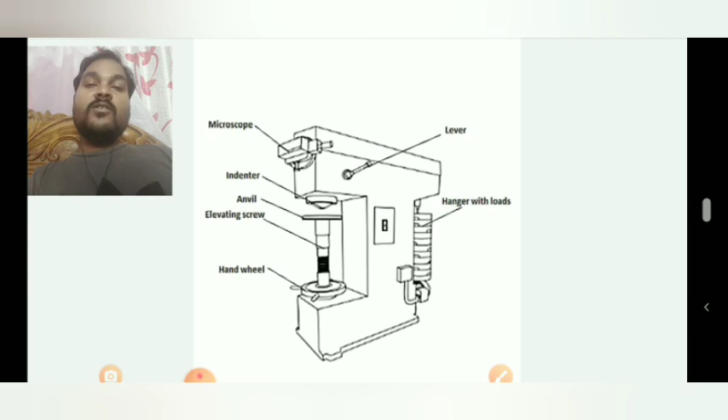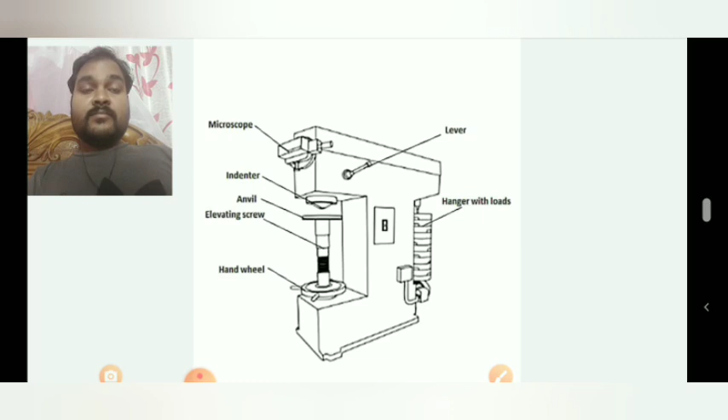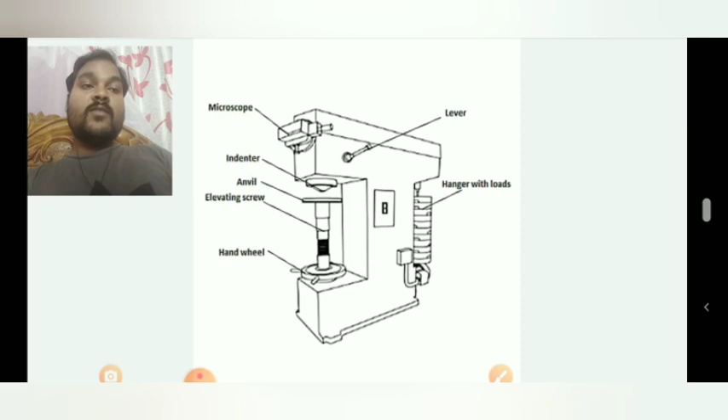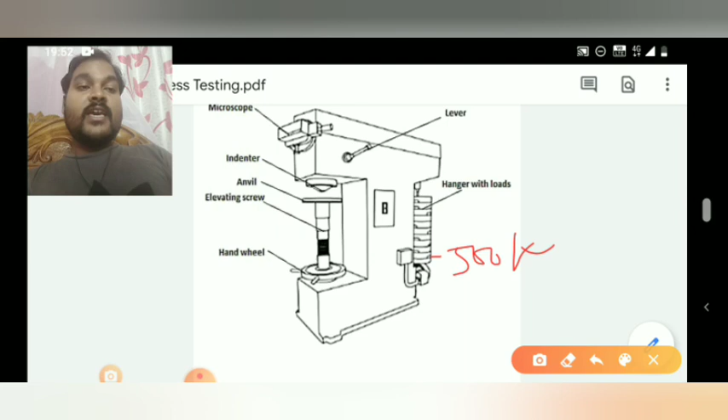First, we'll discuss the machine and how we use it. In our Brinell hardness testing machine, on the backside we have the hanger with load. In this position, we have different types of load, around 500 kg to 3000 kg. We also have a lever, and by this lever we apply however much load is needed.

This is the microscope which is used to detect the indentation, and this is the indenter position where we place or fix the indenter. Here we use the steel ball indenter.

Next is the anvil where we place the sample. We place the sample here, apply the load, and this indenter will press the material. We take the indentation reading with the help of the microscope.

This is the elevating screw which helps the anvil move up and down. This is the hand wheel - with the help of the hand wheel, we move the anvil position up and down, to fix the sample position towards the indenter. This is the basic knowledge of this machine.

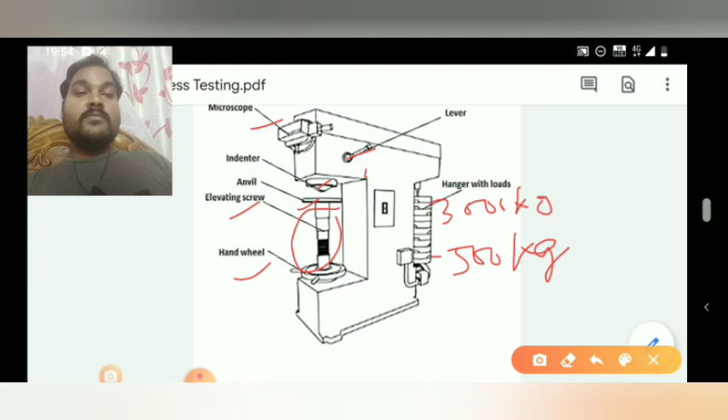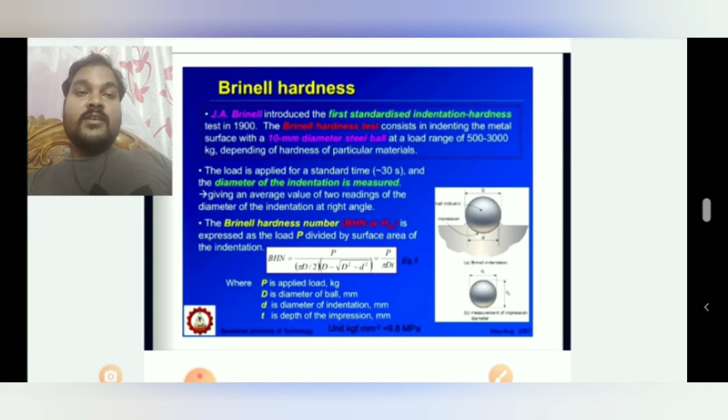Now we'll discuss how the Brinell hardness testing came about, and who first discovered the Brinell hardness testing operation. Scientist J. A. Brinell first discovered the Brinell hardness testing operation. J. A. Brinell introduced the first standard indentation hardness test in 1900.

The Brinell hardness test consists of indenting the metal surface with a 10 diameter steel ball, meaning the ball diameter is 10, at a load range of 500 to 3000 kg. So here we use up to 500 to 3000 kg load, which helps create that indentation.

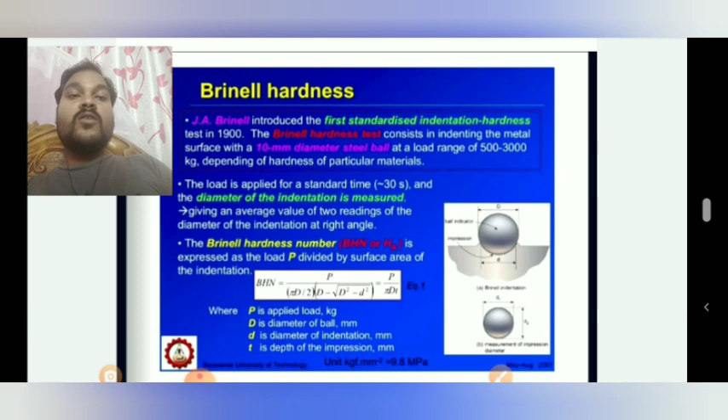After applying the load and taking the indentation, we measure the diameter of the indentation. We take an average value of two readings of the diameter of indentation at right angles. This is the steel ball used as the indenter, which applies force into the material and produces the indentation, which also produces a separate diameter.

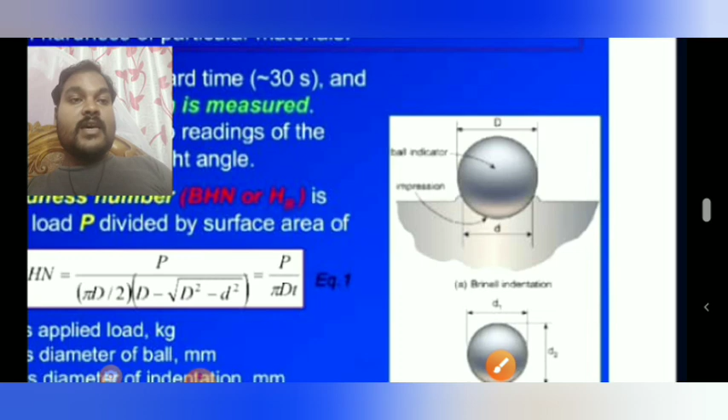The steel ball diameter is capital D, and the indentation diameter produced will be small d. This small d is measured by scale, taking at least two values. This diameter value is measured two times, and this is divided by 2 to get the average value.

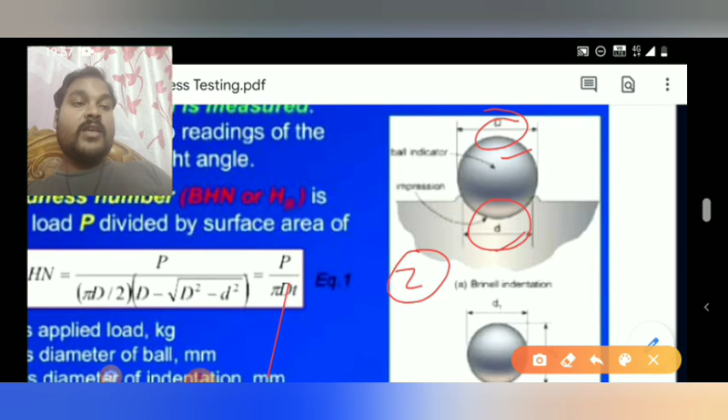The Brinell hardness number is expressed as load divided by surface area of indentation. The formula is: applied load - how much load is applied to the material to produce the indentation - divided by the surface or area of indentation, which is the total area created with the help of the indenter.

The formula is: Load applied divided by pi into D into t, where D is the diameter of the steel ball, and t is the depth of indentation - meaning how much depth the indenter introduces into the material.

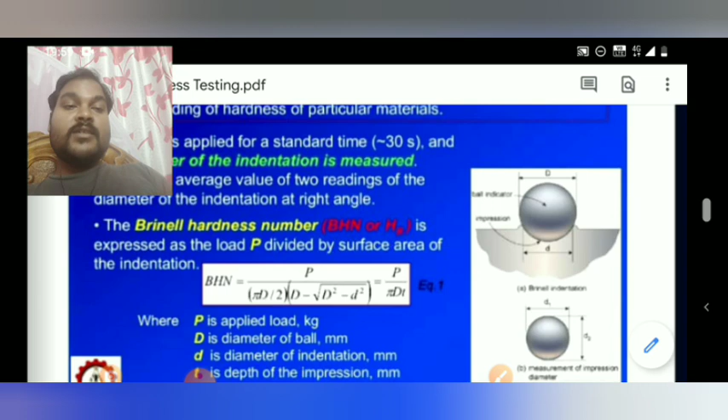So normally we use the formula BHN equal to P divided by [pi D by 2] into [D minus root over D square minus d square], where P is the applied load in kg, capital D is the diameter of the steel ball, small d is the diameter of indentation, and T is the depth of impression.

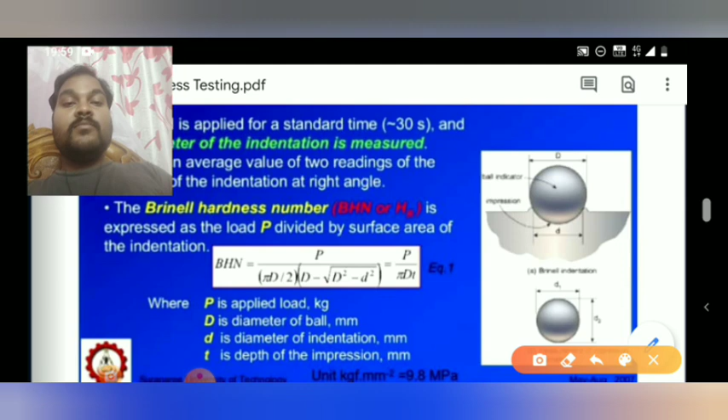Here we use P divided by pi d t. Here we are taking the small t, which is the depth of indentation.

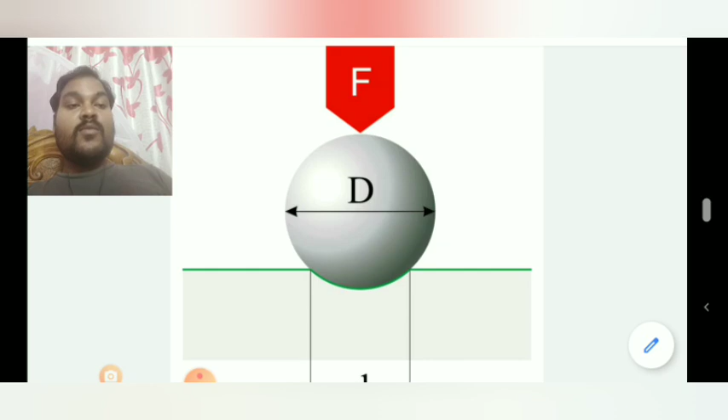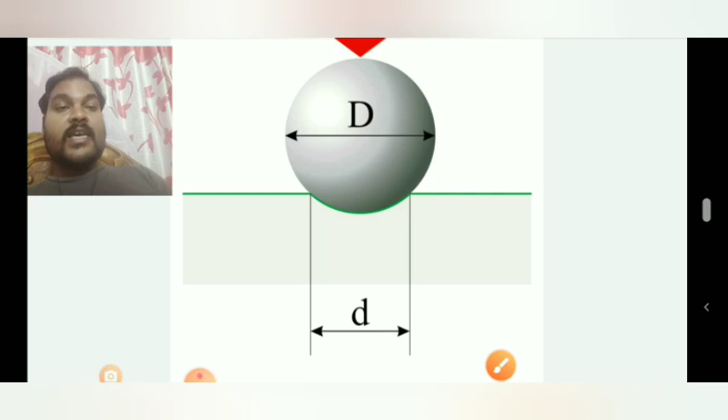Okay, now we'll see again. This is the applied force, this is the steel ball, and we applied that force F and produced the indentation area. This is the area of indentation, this total area is the indentation area. So we calculate this indentation area, and this way we calculate the value of hardness number.

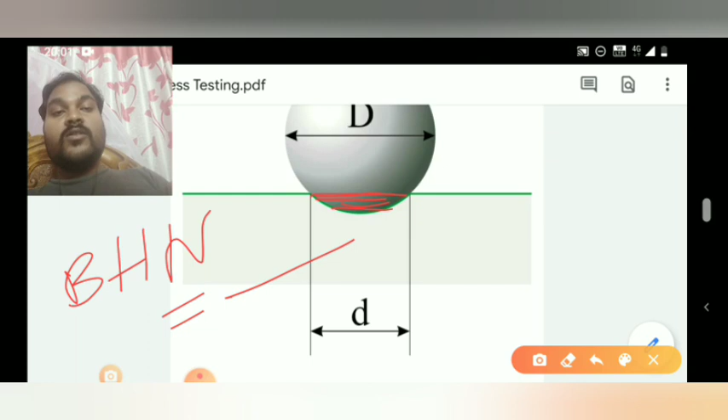Brinell hardness number will be denoted by BHN. BHN equal to the applied load divided by area of the indentation, which will be denoted by pi into d into h, or we can write it as small t, right, h or small t.

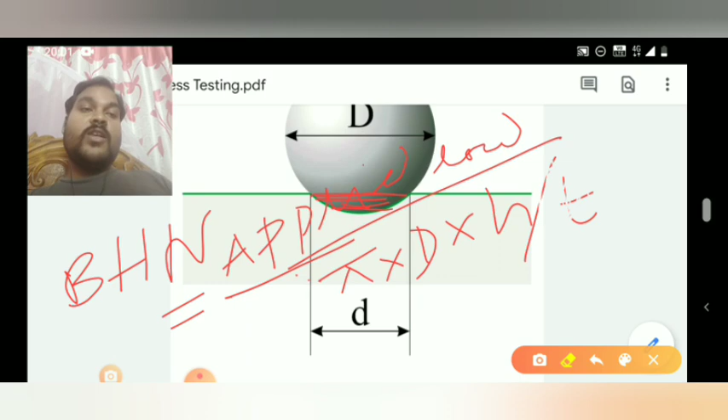Here we use small h as the depth of indentation. Okay, now what are the precautions used in this testing operation?

First of all, the precaution we use: the thickness of the specimen should not be less than 8 times the depth of indentation, to avoid the deformation extending to the opposite surface of the specimen.

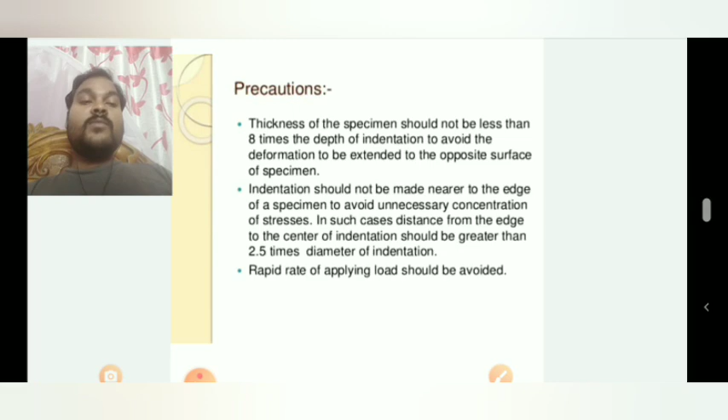That means, suppose you take the sample and the steel ball which has diameter 10. This steel ball diameter is denoted by capital D. So this area is d by 2, and this is the indentation.

So what is the depth of indentation? This is the depth of indentation, which is denoted by small h. So the sample thickness at this depth of indentation would be 8 times the depth of indentation. So sample size would be 8 into h, that means 8 times that value we need for the sample size.

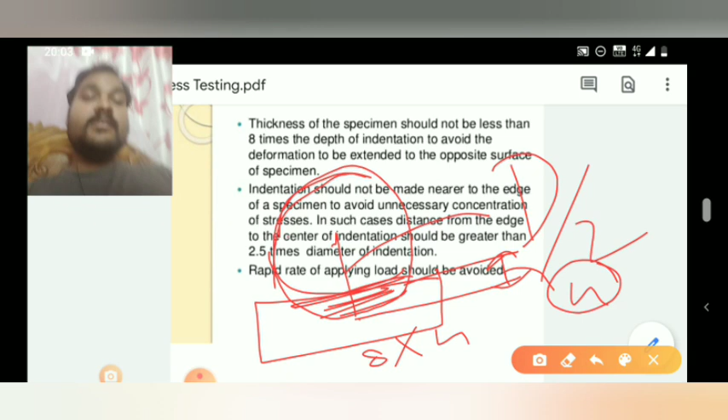Next, the indentation should not be made near the edge of the specimen, to avoid unnecessary concentration of stress. In such case, the distance from the edge to the center of the indentation should be greater than 2.5 times the diameter of indentation.

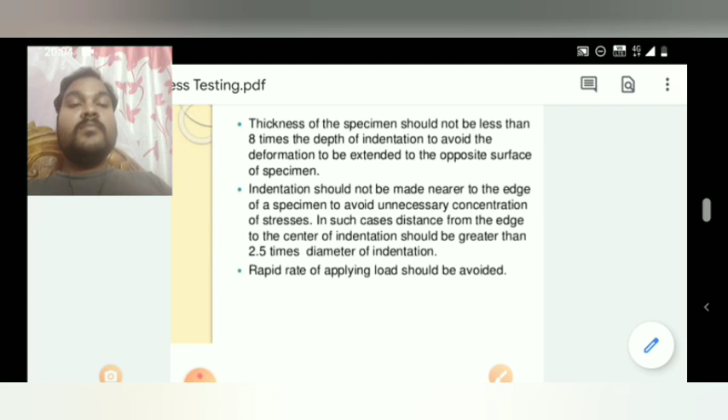Here also we see we cannot take the hardness at the end of the sample. That means, suppose this is the sample, we cannot take the hardness value at the surface point. If we take the hardness value at the surface point, it can produce different types of unnecessary concentration of stress.

That means in that position maximum pressure will be created and the depth of indentation will get a greater value. So we cannot tell the appropriate value of the Brinell hardness number, or we cannot take the actual value of hardness of that material.

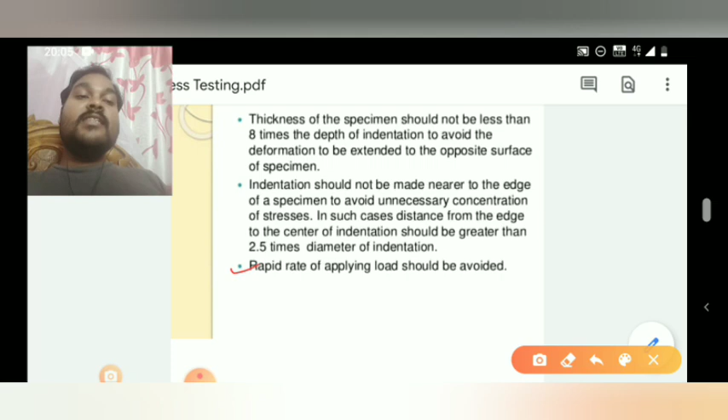And the third precaution is that a rapid rate of applied load should be avoided. We cannot apply that load again and again.

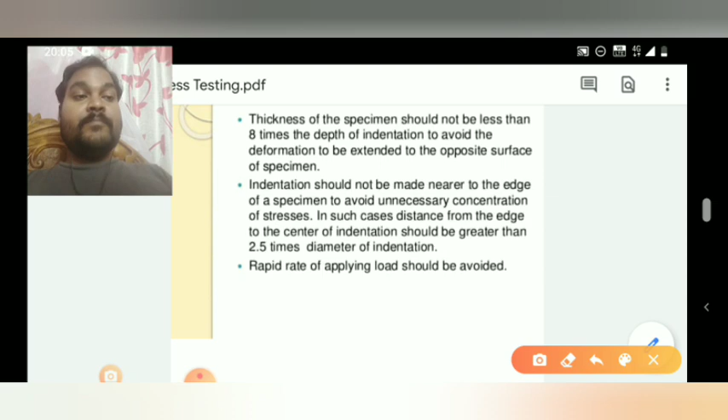So these are the precautions. The main precaution is the first one: the thickness of the sample should be 8 times the depth of indentation. Okay, and now we'll see this is the diameter of the steel ball.

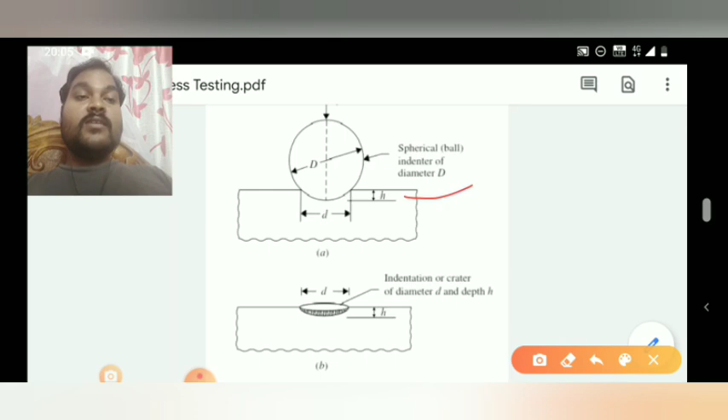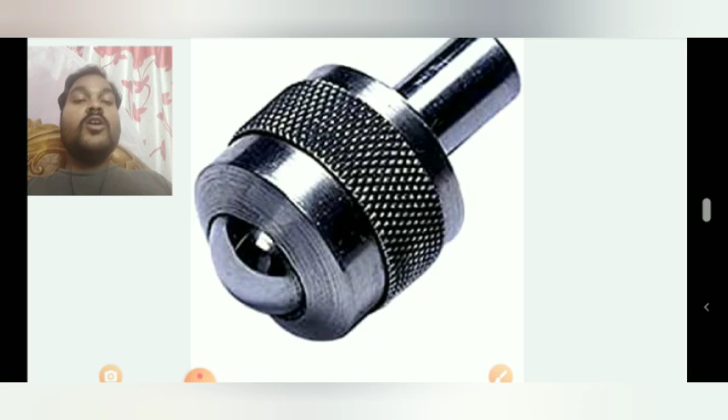This is the depth of indentation, denoted by small h. Now, we use a steel ball as indenter in case of Brinell hardness testing operation. In most cases, we use the steel ball which has diameter 10 mm, but we can also use a 5 diameter steel ball.

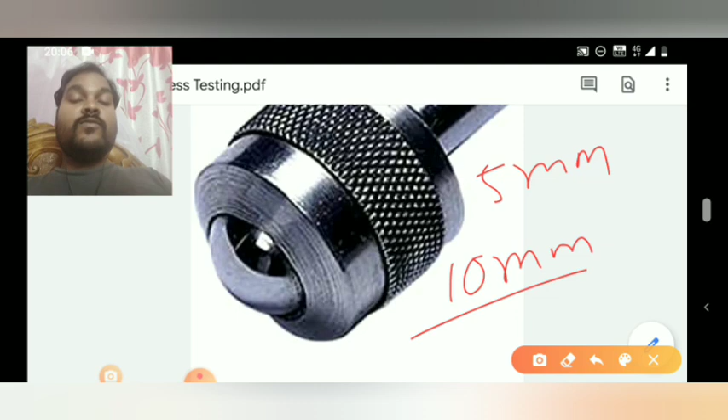So two things vary: one is the indenter size, and the other is how much amount of load we use in this hardness operation. Here we use the hardness load 500 kg to 3000 kg. This is the maximum value of load, 3000 kg.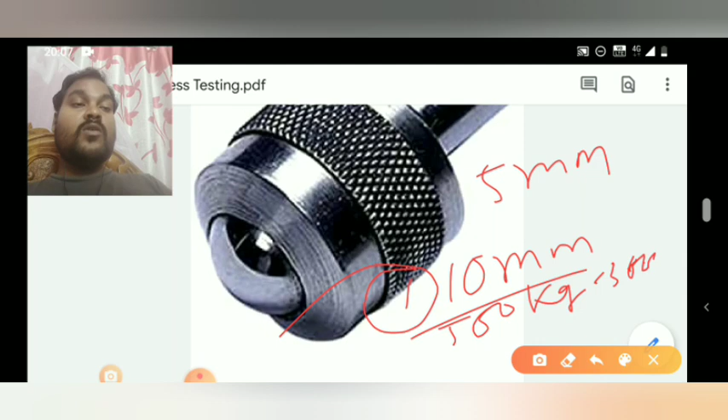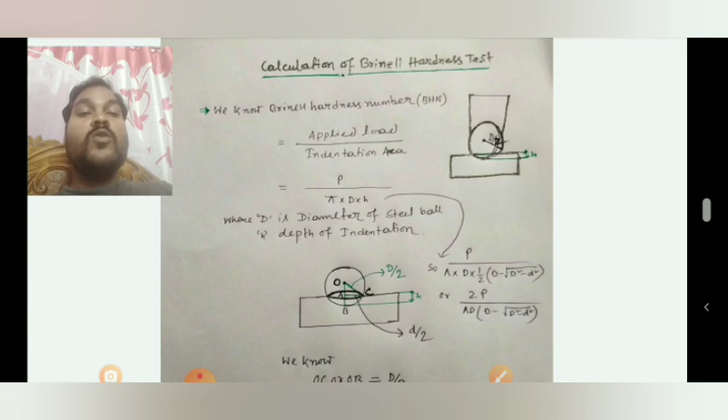Okay, now we'll discuss the calculation of the Brinell hardness test. This is vital for the Brinell hardness testing operation. How do we calculate? We know Brinell hardness number, denoted by BHN, is equal to applied load divided by indentation area.

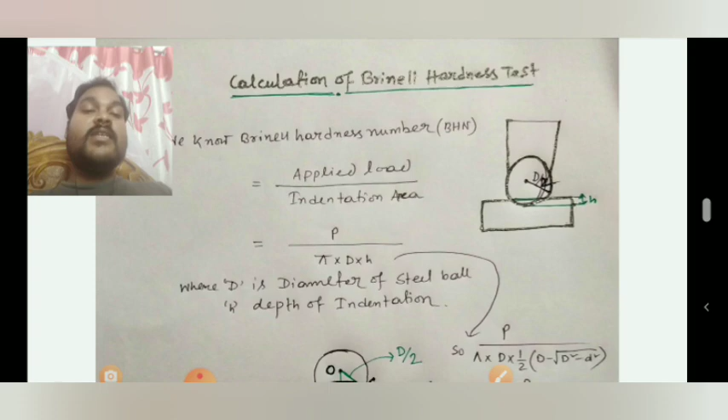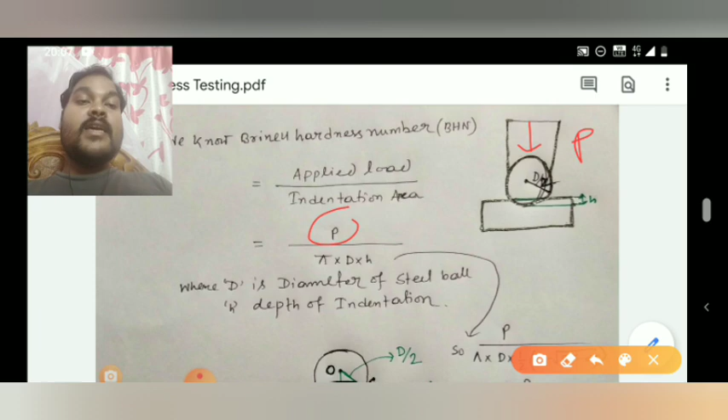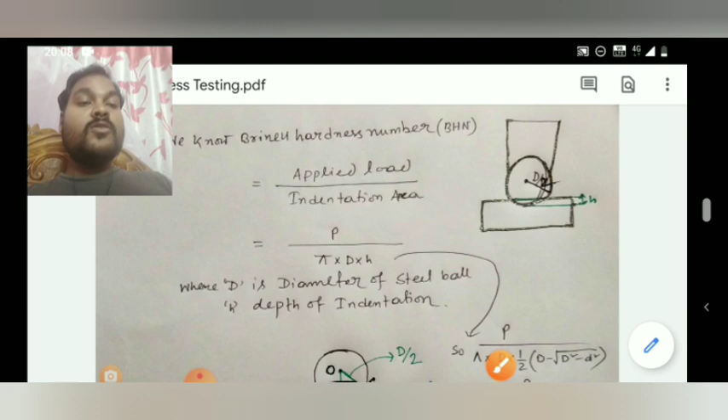So applied load is P. That means the indentation area is pi times d into h, where d is the diameter of the steel ball and h is the depth of indentation. So we don't know the value of h. So how do we calculate the value of h?

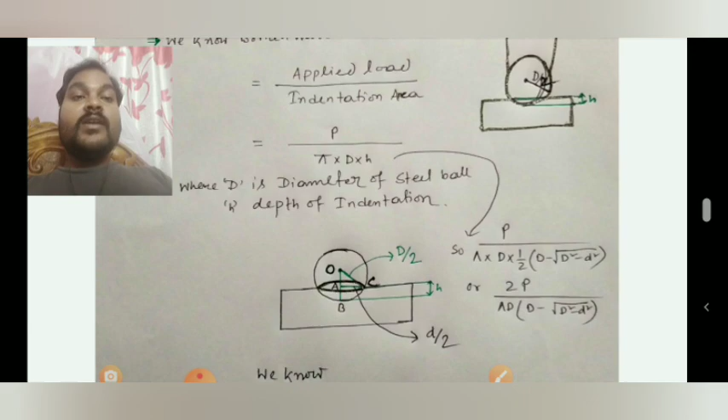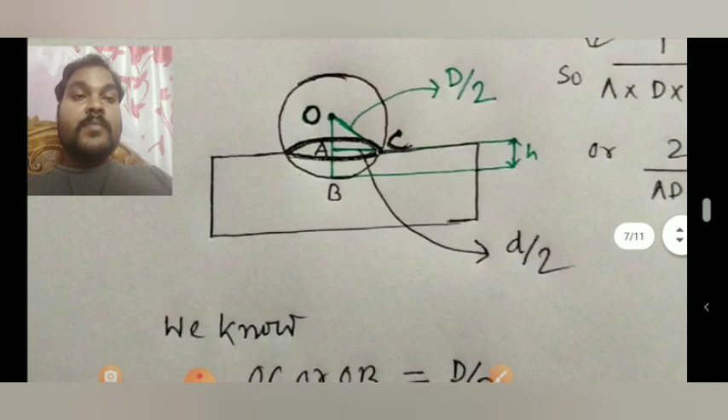As we know, if we do not know the h value, then we cannot get the actual indentation area. So first let's see the actual dimension of the sample, or actual dimension of the indenter. Suppose we take a sample, this is the sample.

This is the steel ball, and we applied the load from above, which is P. When we applied the load, it penetrates into the material and produces an indentation, giving us the h value, the depth of indentation. So OC, this value, is the capital D divided by 2, which is the radius of the steel ball.

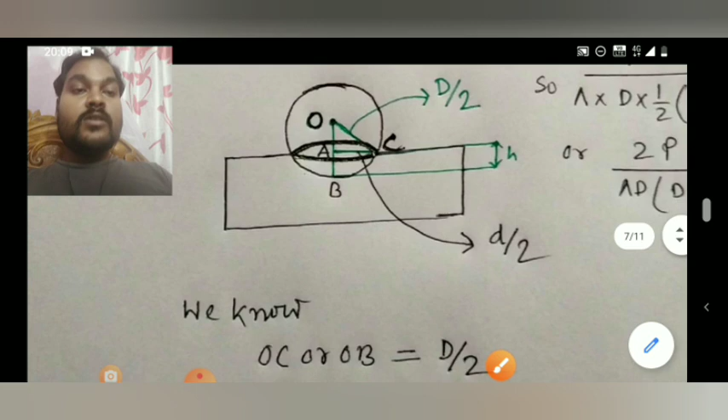So we can say OC equals OB, because this is also a radius of the steel ball. So that's why we write OC or OB equal to D by 2. But we need the value of AB, which is h, but we don't know the value of h.

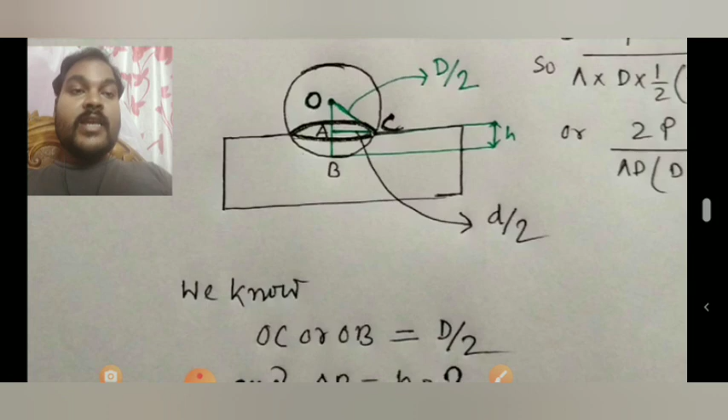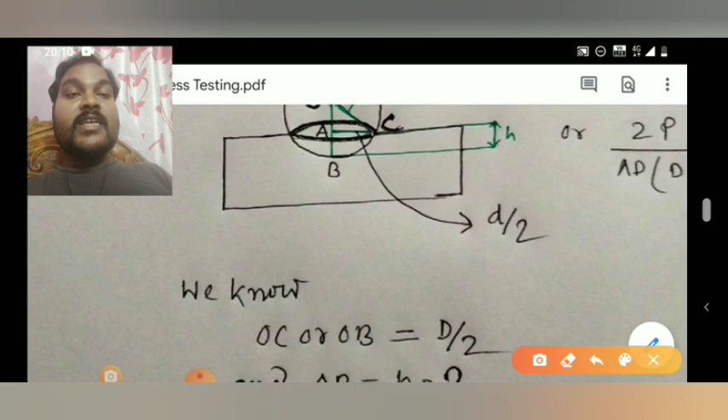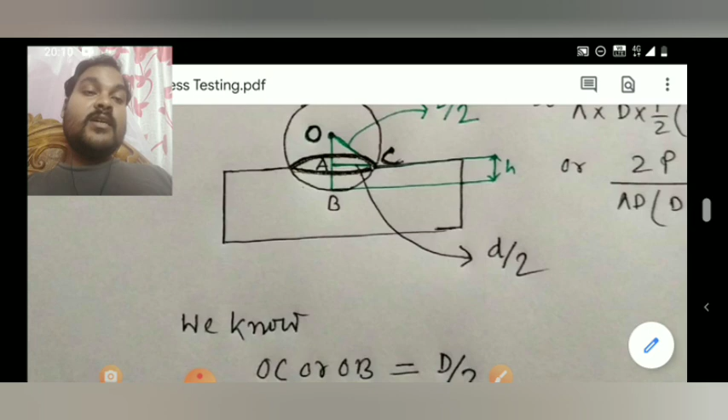So first we don't know the value of OA, and here this green color line, which is also small d by 2, is the diameter of the produced indentation area, denoted by small d, which is the diameter of indentation. So its radius is also d by 2.

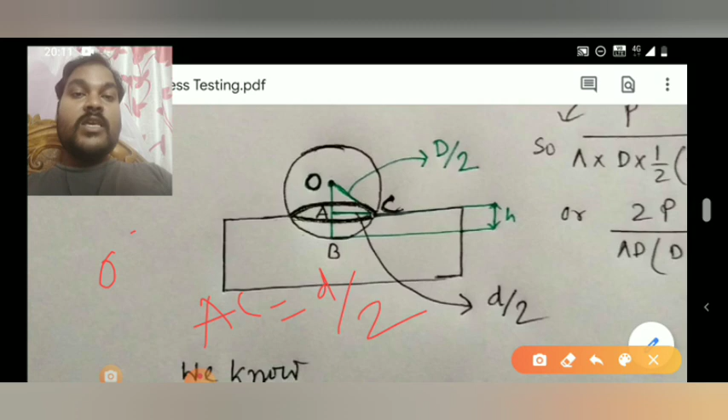So we can say AC is the small d divided by 2. So we know OC equals capital D by 2, and AC equals small d by 2, and OC, or we can say OB, is also the radius of the steel ball.

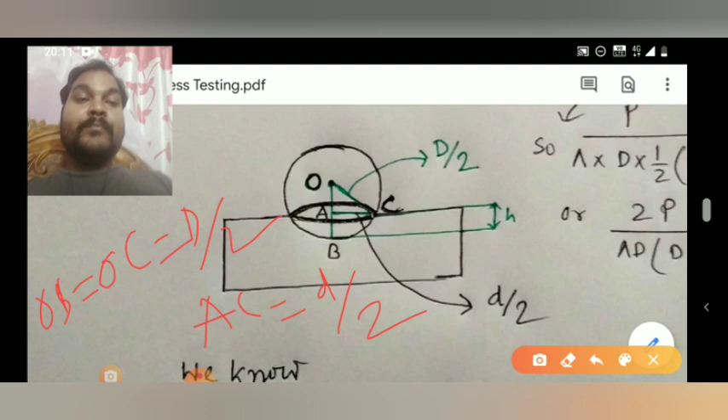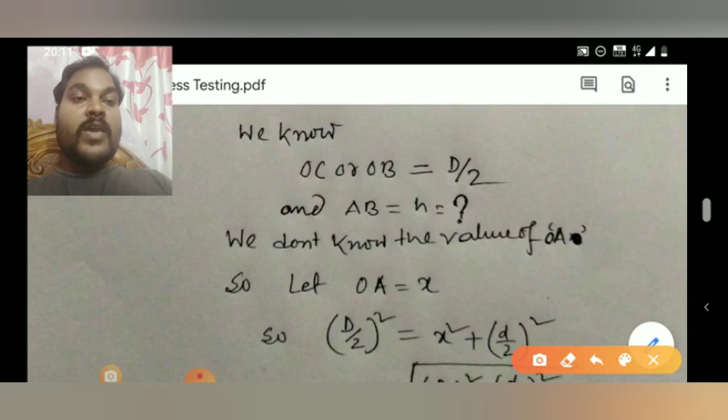So first we'll calculate the value of OA. We take the value OA equal to x. So OA equal to x, we can write OC square equal to OA square plus AC square.

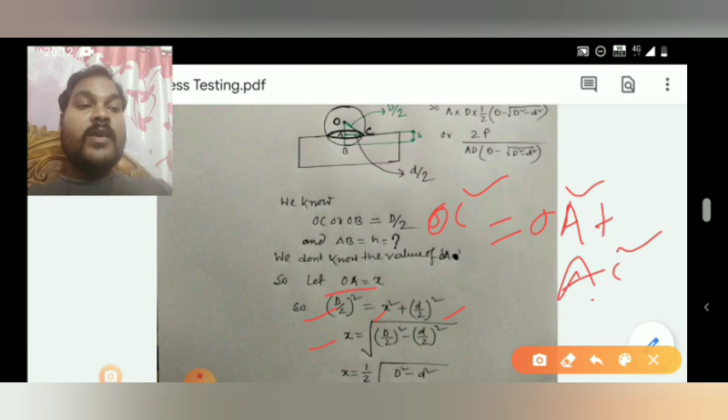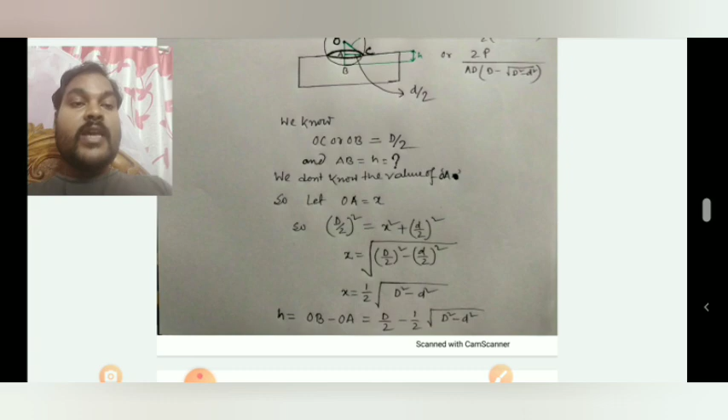So capital D by 2 square equals x square, because we take OA equal to x, plus AC square, and AC is small d by 2. From that position we get the value x equal to root over capital D by 2 square minus small d by 2 square. So when we transform this equation, we get x equal to half into root over capital D square minus small d square.

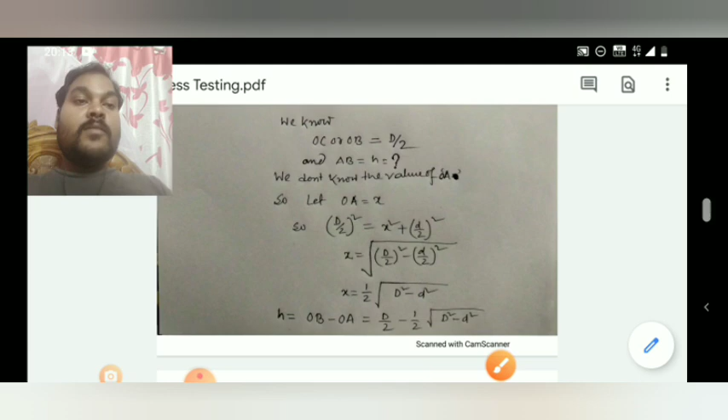But this is the value of x, meaning the OA value. So this is the OA value. But we want to know the h value.

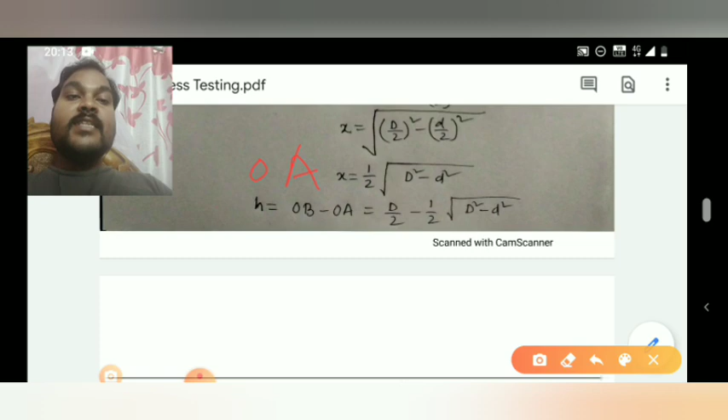So h equal to AB. How do we get the AB value? AB value equals OB minus OA. We know OA equal to x, and we get the value of x, and OB equal to capital D divided by 2. So capital D divided by 2 minus x, this is the value of AB.

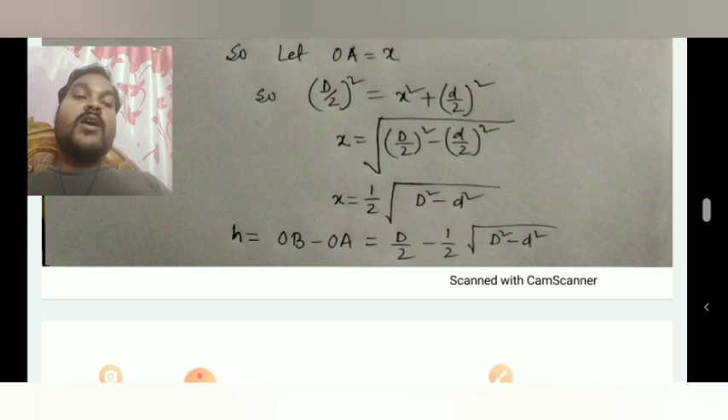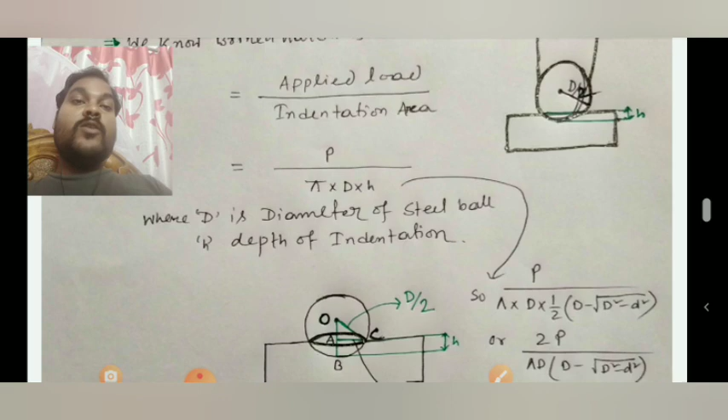This is the value of AB, that means the h value. So h equal to capital D divided by 2 minus half into root over capital D square minus small d square. From that point of view we can write, we know BHN equal to P divided by pi dh.

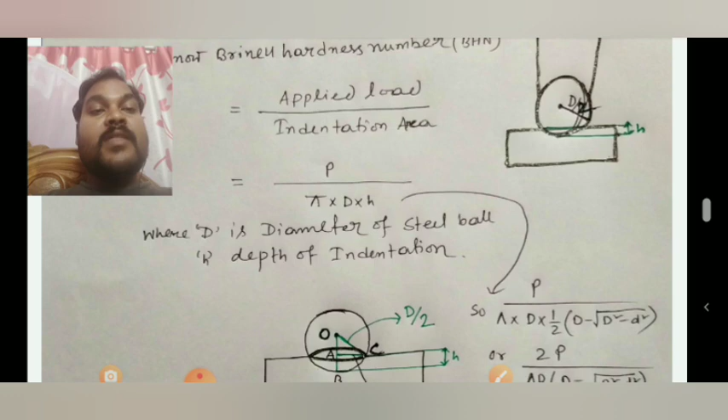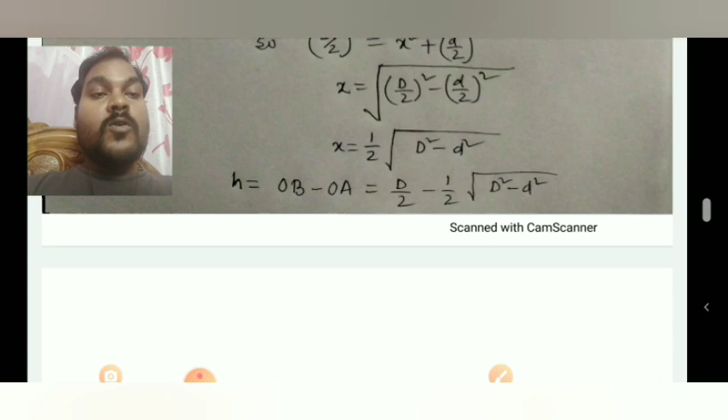So now we have the value of h. So P divided by pi into capital D, and the h value equal to, taking the common value as half, half into capital D minus root over capital D square minus small d square.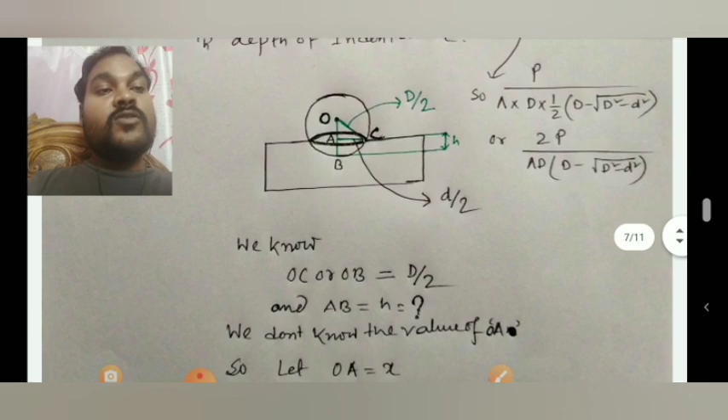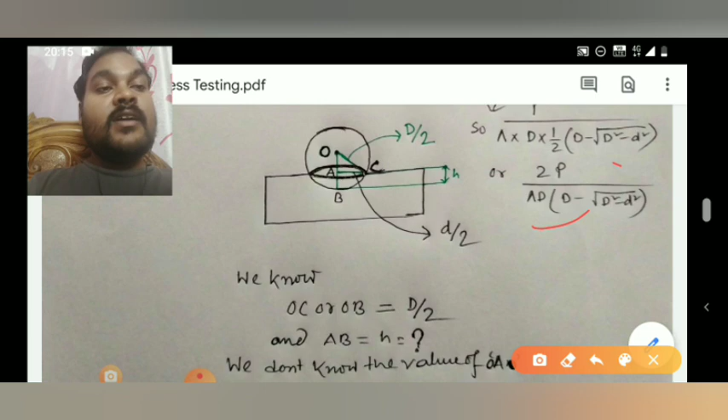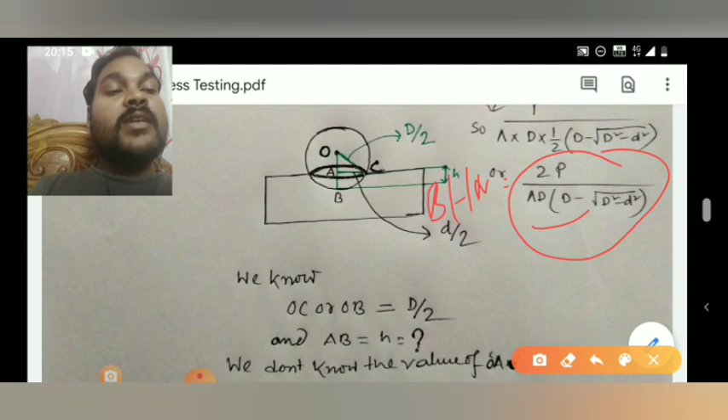So from here we derive this equation: 2P divided by pi capital D into capital D minus root over capital D square minus small d square. This is the actual formula of BHN. So BHN equal to 2P divided by pi capital D into capital D minus root over capital D square minus small d square.

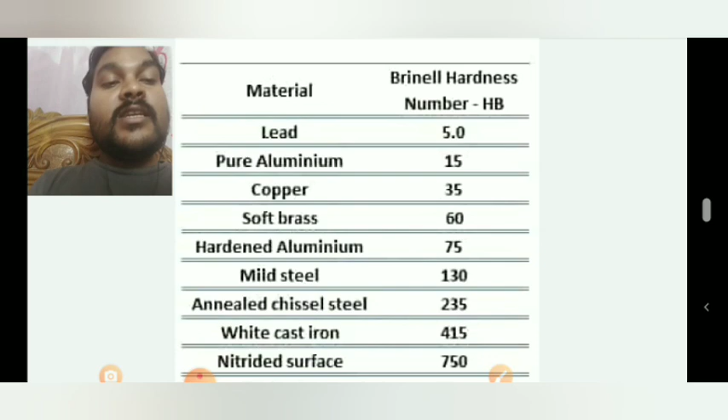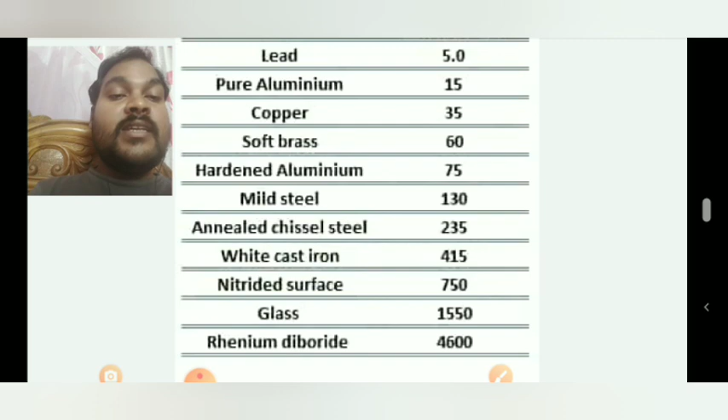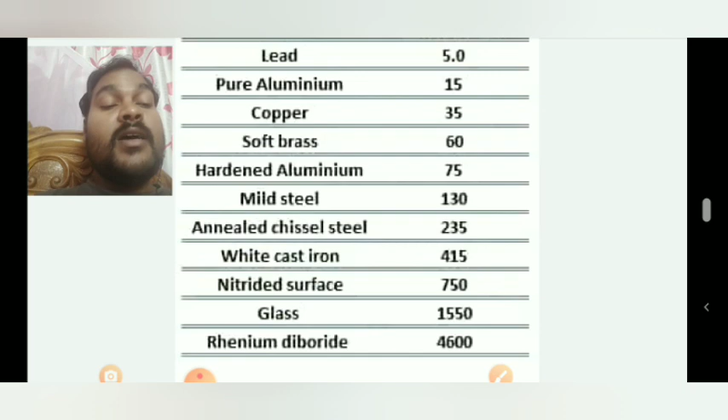So these are the materials, and according to material we have the Brinell hardness number. Lead has a Brinell hardness number around 5. Pure aluminium has 15, copper 35, soft brass 60, hardened aluminium 75, mild steel we take as 130, annealed chisel steel 235, white cast iron 415, nitrided surface 750, glass which is a brittle material 1550, and rhenium diboride has the value of 4600.

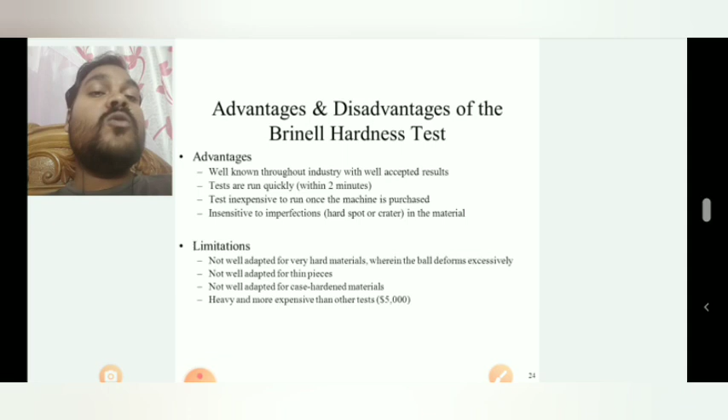It is also not well adapted for case hardened material - in case of case hardened material, we also cannot apply the Brinell hardness test. And it is heavier and more expensive than other tests, if we compare to other hardness tests like Rockwell and Vickers, which are very easy. Mainly the Rockwell hardness test is inexpensive, and we get the value of the material very easily. So compared to Brinell, Rockwell is the fastest hardness operation.

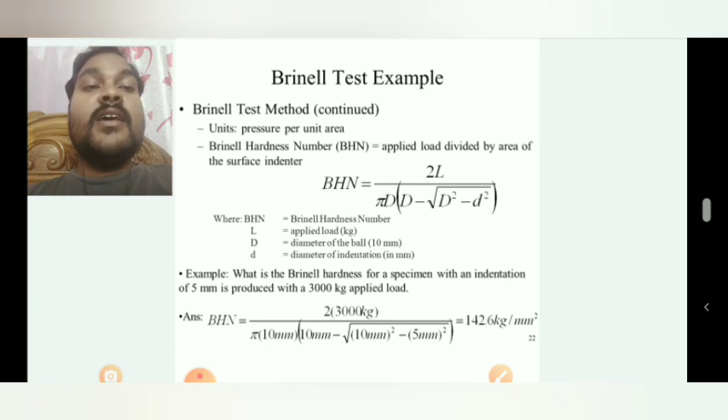So now we'll discuss the Brinell hardness test example. We know the actual formula of Brinell hardness number: BHN equal to 2P divided by pi capital D into capital D minus root over capital D square minus small d square. This is capital D.

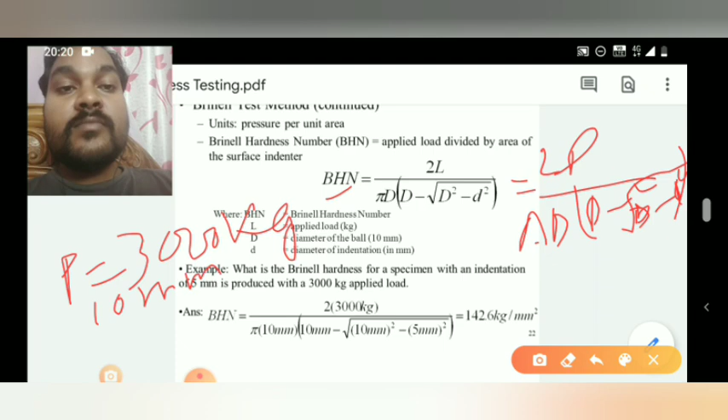So from this formula, we'll see one example. What is the Brinell hardness of a specimen with an indentation of 5 mm produced with a 3000 kg applied load? Here P is 3000 kg. The indentation or indenter diameter is not given, so we'll take the value of 10 mm - this is the capital D value. The given indentation diameter is 5 mm, so small d is 5 mm.

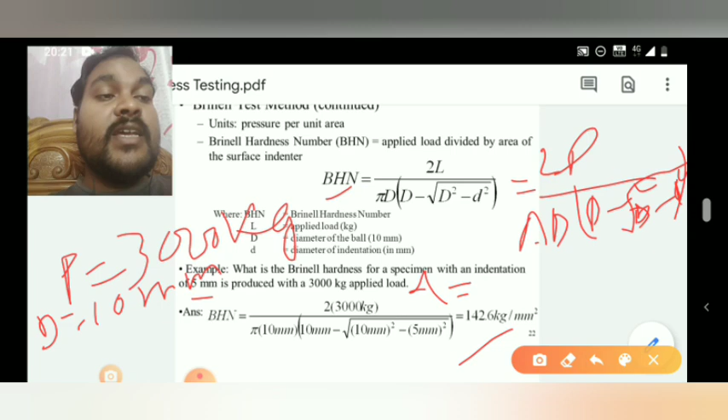From that, we get the value of 142.6 kg per mm square. This is the Brinell hardness number. There are two different questions - this is the home task. You can apply this equation and calculate the Brinell hardness of the material.

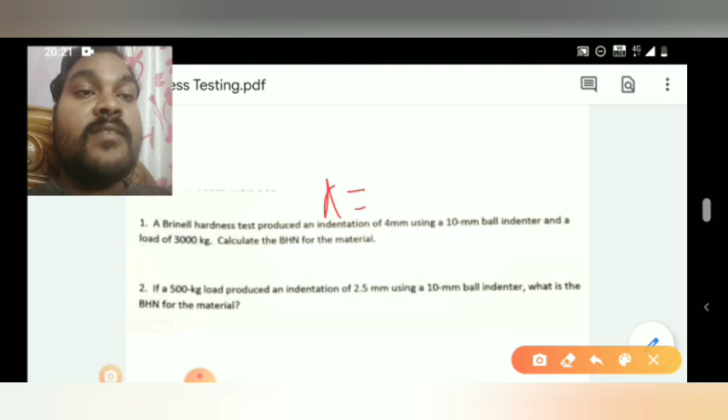First one: the Brinell hardness test produces an indentation of 4 mm. That means the indentation small d is 4 mm, capital D is 10 mm, and the load P equal to 3000 kg. From that equation we get the value of the Brinell hardness number.

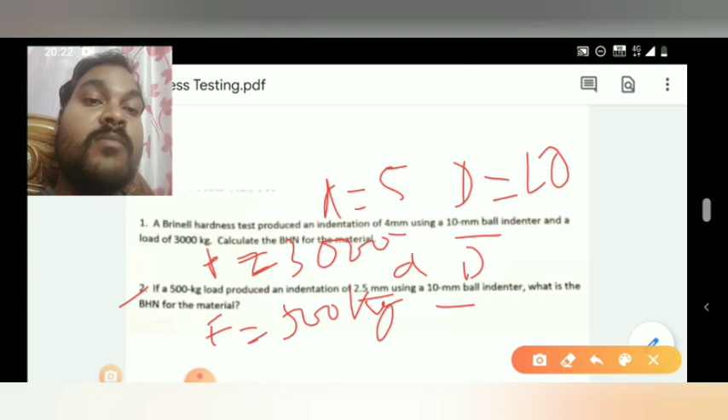Also we have a second question where F equal to 500 kg, small d is 2.5, and capital D is 10. From this equation also we get the value of the Brinell hardness number. So you will try this question at home.